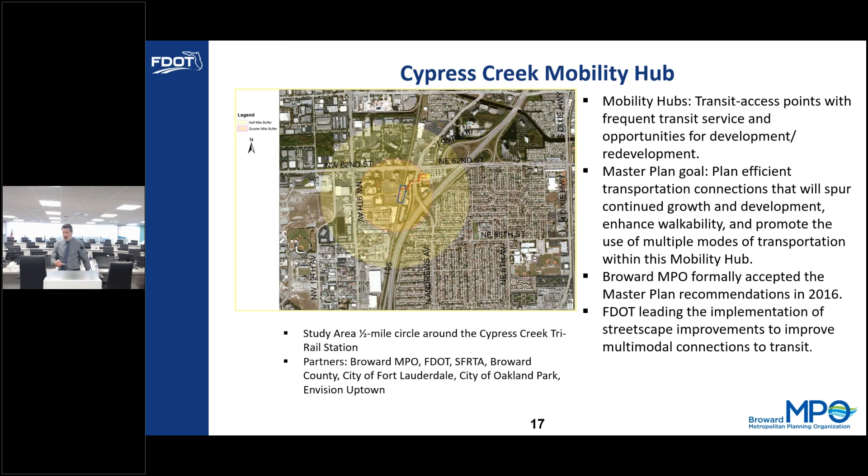Thank you, James. Good evening, my name is Anthony Georges. I'm the consultant project manager with BCC Engineering. We'll cover slide 18 now, and I wanted to go over some background on the project.

Wanted to go over some background on the project. This project is actually part of a larger set of overall improvements in the area.

The DOT has split the work into 5 separate projects: segments 2, 3, 4, 5, and 7. Our focus today is segment 5, shown in yellow in the graphic. Segment 5 is currently at a 30% level of design, moving towards our constructability submittal, which is roughly a 60% level of design.

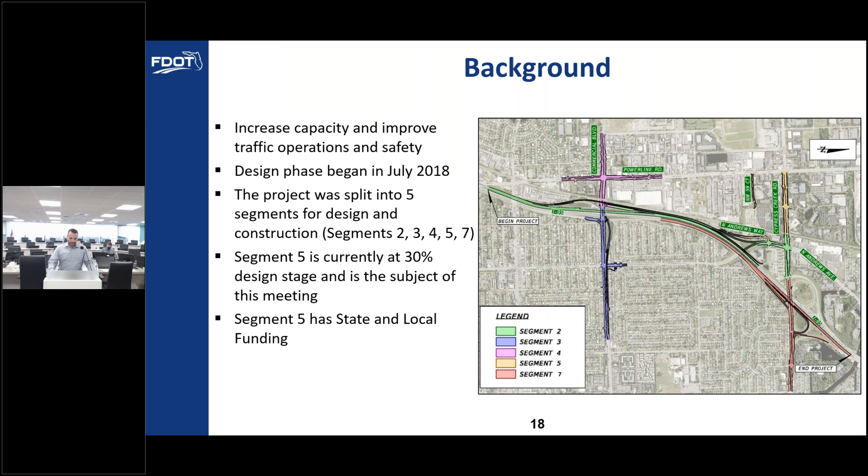Slide 20. Now we'll review our proposed improvements for the project for each road. Slide 21. Cypress Creek Road has a mix of different improvements proposed.

First, we'll be resurfacing and performing some minor widening on Cypress Creek Road. In addition to that work, we'll be constructing shared use paths on both sides of the roadway, and we'll get into a little bit later what the shared use path is and its benefits.

On North Andrews Way, we'll be resurfacing and constructing new sidewalk along both sides of the roadway. On Northwest 59th Court, we'll also be resurfacing, installing new curb and gutter, and constructing a shared use path along the south side of the roadway and a new sidewalk along the north side. Next slide, please.

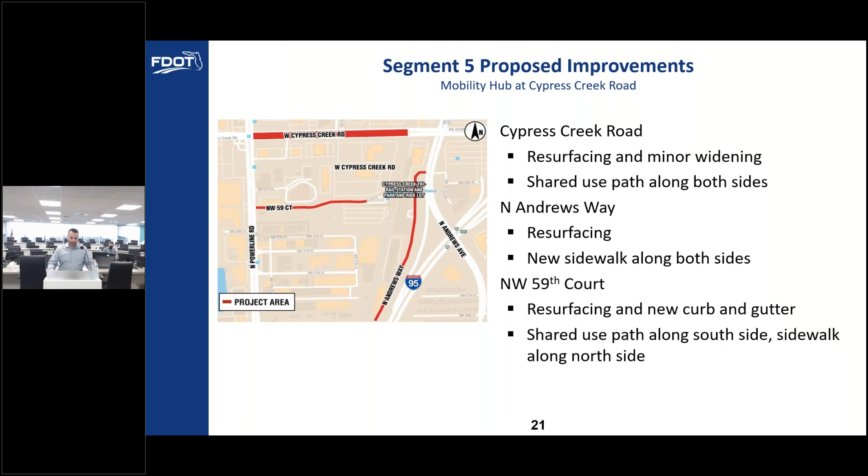Slide 22. Now we'll be looking at typical sections for each of the roadways. These slides will all be the same. On the top left, you can see the existing configuration for Cypress Creek Road. On the bottom right, the proposed configuration. Looking from left to right, we'll be constructing a new shared use path that will replace the existing sidewalk. That shared use path will be 10 feet wide, accommodating pedestrians and bicyclists along Cypress Creek Road, and separated by a buffer from the traffic lanes.

In the westbound direction of Cypress Creek Road, we're proposing a right turn lane, 3 through lanes, and a left turn lane. On the east side, there'll be 3 through lanes and a dedicated right turn lane. Similar to the westbound side, there'll be a shared use path 10 feet wide accommodating pedestrians and bicyclists with a buffer separation from traffic. Next slide, please.

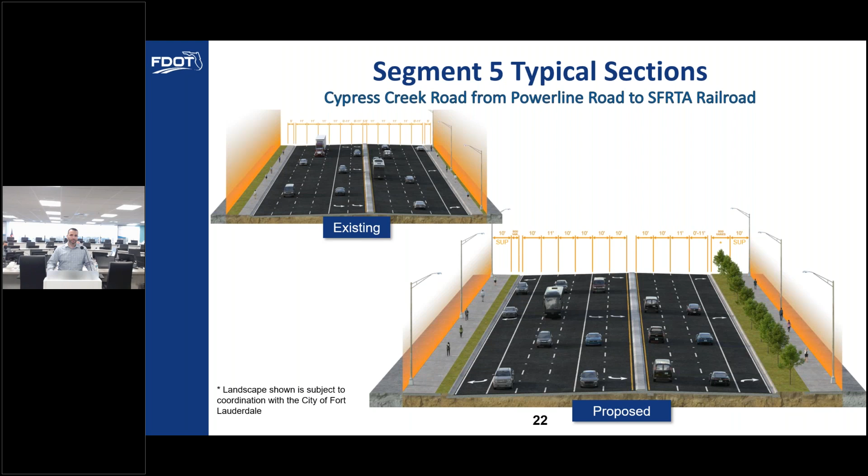Slide 23. Now we're looking at a typical section for North Andrews Way. The existing section has sidewalk and on-street parking. We'll be providing sidewalk on both sides of the roadway and maintaining the on-street parking while resurfacing the existing road. Next slide, please.

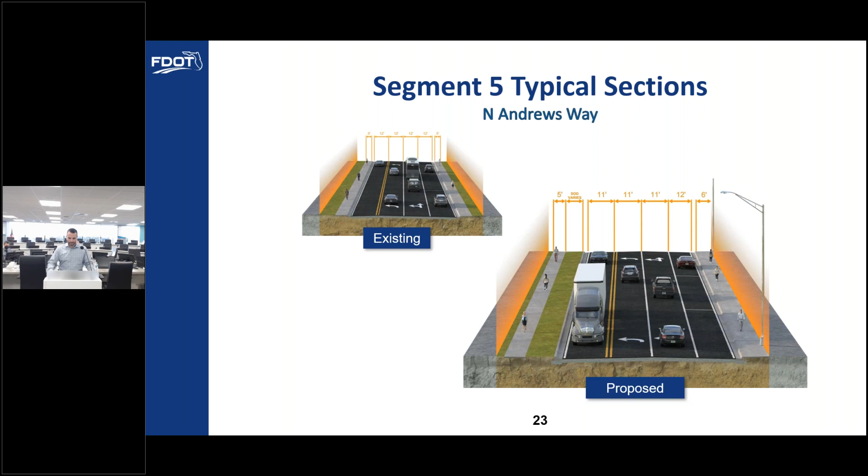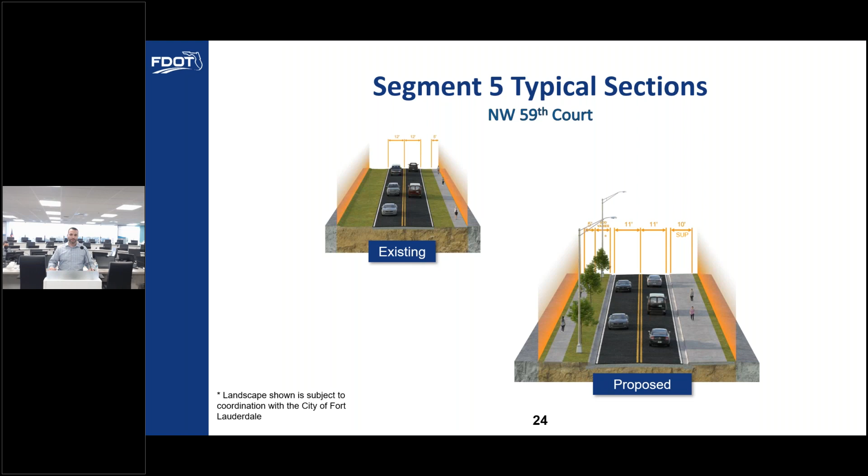Slide number 24. This is a typical section for Northwest 59th Court. Currently, there's only a sidewalk along the south side of the roadway. We'll be modifying the roadway to add curb and gutter, a new sidewalk along the north side, and construct a shared use path similar to Cypress Creek Road, 10 feet wide, accommodating pedestrians and bicyclists on the south side of the road. Next slide, please.

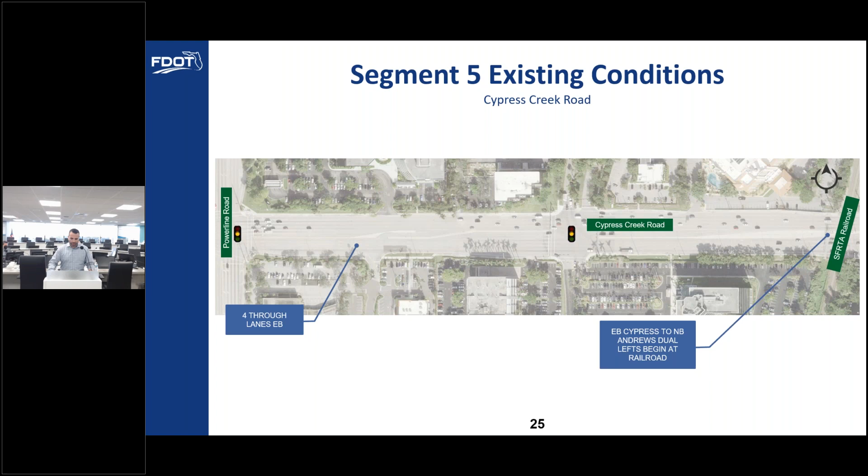On slide 25, these slides show plan view comparing existing conditions to the proposed improvements for the roadway. You can see the existing eastbound direction has 4 through lanes, with a sidewalk right adjacent to the curb and gutter. Next slide, please.

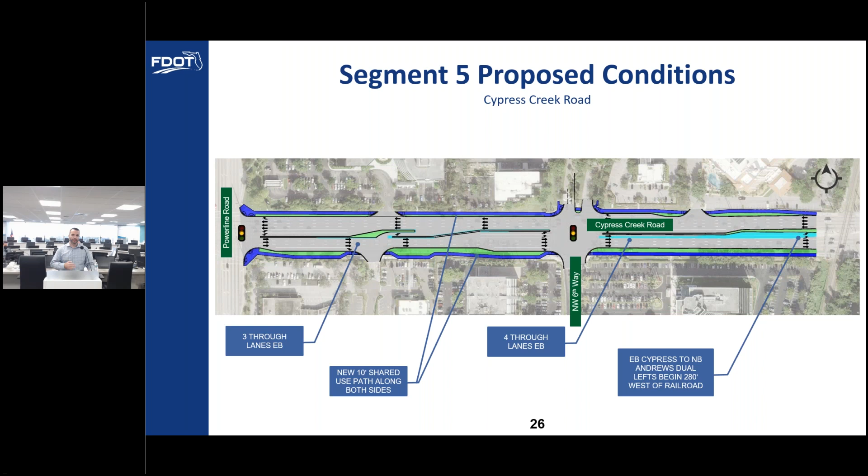We're also improving capacity by adding additional storage in the left turn lanes for traffic going from eastbound Cypress Creek to northbound Andrews. Currently those turn lanes begin at the railroad tracks; we'll be extending that to the west to accommodate additional storage. Next slide, please.

Slide 27. This is the existing configuration of North Andrews Way. There is existing on-street parking, as mentioned before, and a sidewalk that goes into the Tri-Rail station, but it's not continuing.

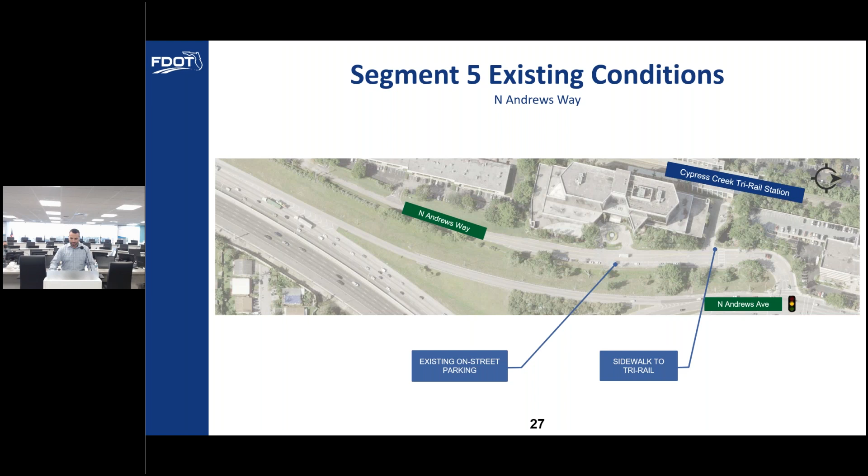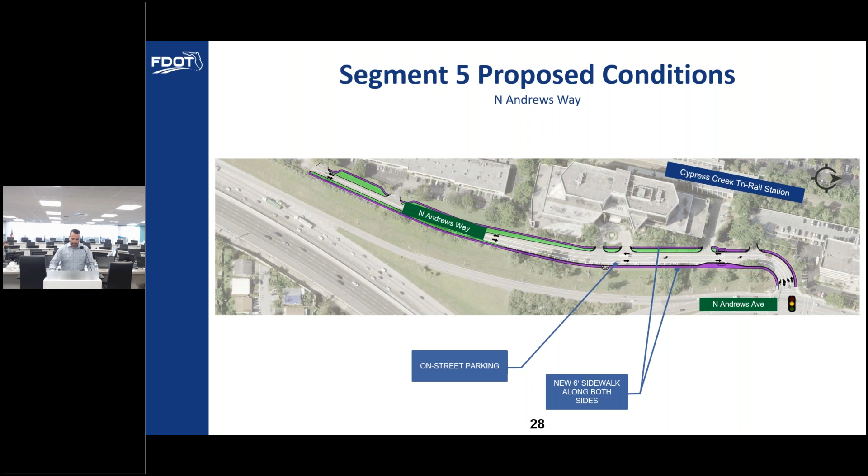On slide 28, you can see our proposed improvements with new sidewalks shown in purple along both sides of the roadway. As mentioned before, we'll be resurfacing the roadway. Next slide.

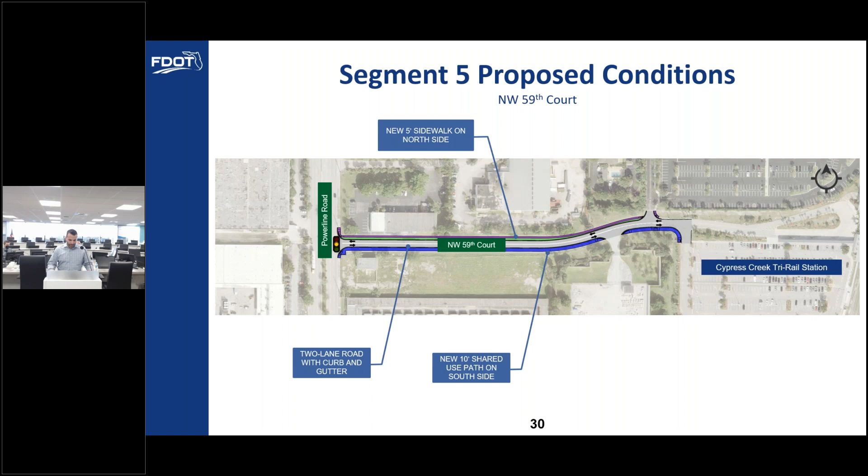Slide number 30. Similar to Cypress Creek Road, we're proposing a shared use path 10 feet wide along the south side, shown in blue. That shared use path will connect from Powerline Road into the Tri-Rail station, accommodating pedestrians and bicyclists. On the north side, we'll be constructing a sidewalk that doesn't exist today, shown in purple, 5 feet wide and separated from the roadway. Next slide, please.

In addition to the construction improvements mentioned earlier, we will have streetscape improvements as well, including new signage for the Tri-Rail station. We'll mark the entrance with entry pylons, one at the southeast corner of Powerline Road and Northwest 59th Court, and the other at the southwest corner of North Andrews Avenue and North Andrews Way. You can see renderings of what that sign may look like; it will serve as wayfinding signage to guide people to the Tri-Rail station. Next slide, please.

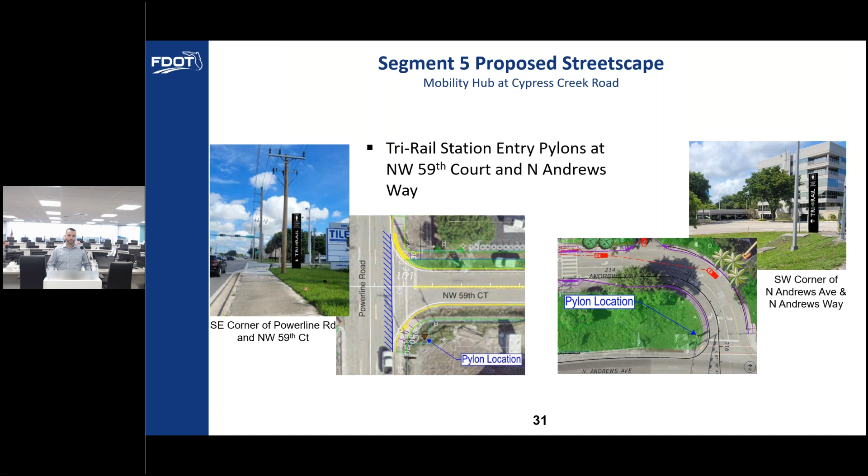Slide 32. There's a number of benefits associated with these improvements. Number one is improved connectivity to Tri-Rail, encouraging future transit-oriented development. As James mentioned, that was a major driver for this project. We want to make sure we're providing multimodal access to transit.

We're also increasing capacity by extending the left turn lanes from eastbound Cypress Creek Road to North Andrews Avenue. We're improving safety by providing a shared use path on both sides of Cypress Creek, as well as along the south side of 59th Court, physically separated from the travel lane to improve safety for pedestrians and bicyclists. We'll also provide new sidewalk on both sides of North Andrews Way and the north side of 59th Court to improve pedestrian connectivity overall. Next slide, please.

Slide 33, our temporary traffic control plan. Next slide.

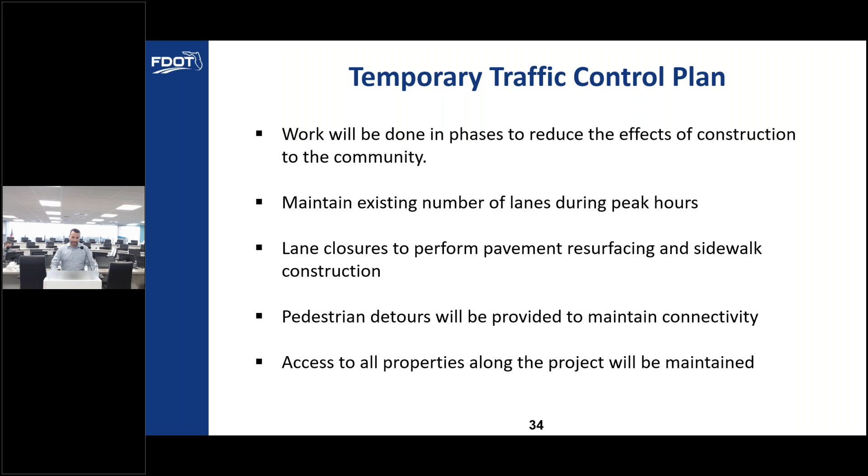Slide 34. To construct these improvements, there will be impacts to traffic, and we will set up a temporary traffic control plan to address these impacts. Work will be done in phases to reduce the effects of construction on the community and the traveling public. We will maintain the existing number of lanes during peak hours, but lane closures will be required in off-peak hours, coordinated with the City of Fort Lauderdale to comply with all local ordinances. We will provide pedestrian detours and connectivity at all times, and maintain access to all properties as well.

Slide 35, we'll review now the project schedule and cost.

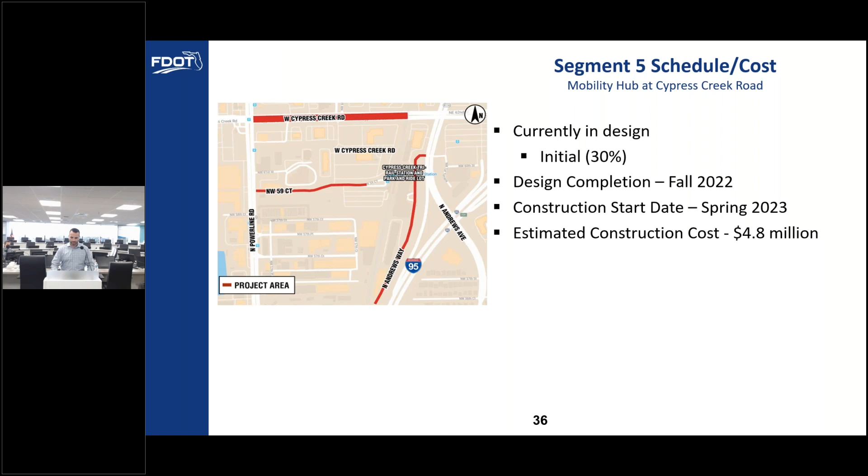All right, slide 37. I'll turn it back over to Leila for our question and answer session.

Next slide. As mentioned earlier, that concludes our presentation. Please submit any questions or comments you may have using the GoToWebinar panel question function.

I'll read the questions that come in. Can you see any? I can't see on the screen. If you'd like to make a comment, please raise your hand.

Leila, we do have a question. I'll read out the question and maybe we can provide an answer, since we can't get up. The question is, what type of crosswalk improvements does the project include to cross Cypress Creek more safely at Powerline Road? Manny, step in.

At the intersection of Cypress Creek and Powerline Road, we are proposing some modifications to the signal in the area, and we will be redoing the existing crosswalk. Ramps will be replaced to meet current ADA criteria, and there will be a dedicated phase for pedestrians to cross the road.